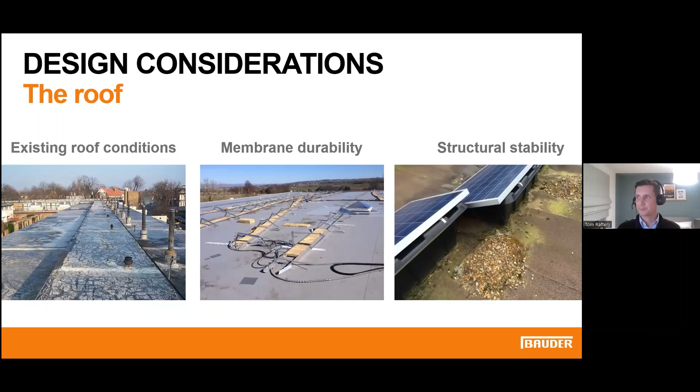So we've established that the roof's okay to put our solar on. There's a number of different ways that we can fix that solar to the roof. Historically, there were a lot of systems in the market that were installed through mechanical anchoring. These days, not so much. As an industry, we would only tend to install mechanically anchored systems where you're on something like a tower block, on a pitched roof, or on a coastal application where you've got really high wind loads.

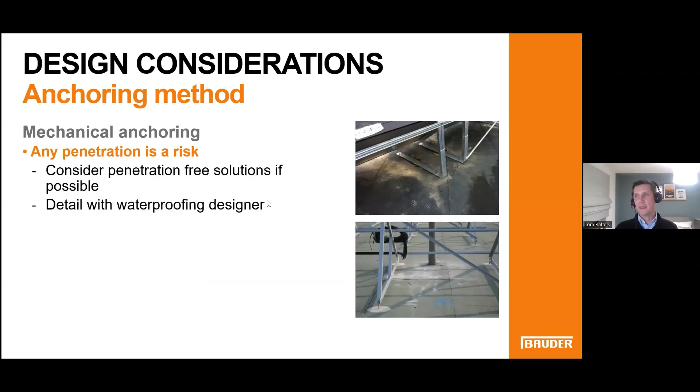If you do have to mechanically fix, then a bespoke fixing, this is a Nicholson IFP. Generally, they'd be provided with a Bauder waterproofing membrane, and that would be fixed down and then welded in. Mechanically fixed systems are more expensive, they're more time consuming. So as an industry, they tend to be avoided, but if you've got any of the criteria I just mentioned, then you will have to.

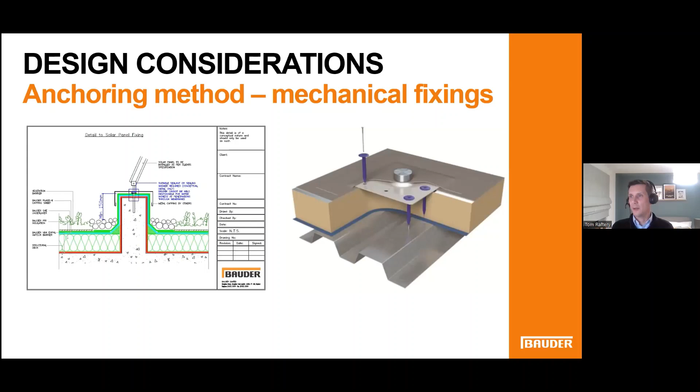We also try and avoid any penetrations through flat roofs. So where you can avoid mechanically fixing, generally that's going to be beneficial. So most of the systems installed on flat roofs will be ballasted. And there are lots of different options for ballasted systems. They are developing all the time, and they're generally these days really very good.

Once that system is in place, you can't do thermal surveys, you can't do a visual survey of the roof. Finding any leaks can be really problematic. And I'll come back to the warranty clauses at the end of the webinar, but just ensuring that there's no negative impact on the roof warranty is really important.

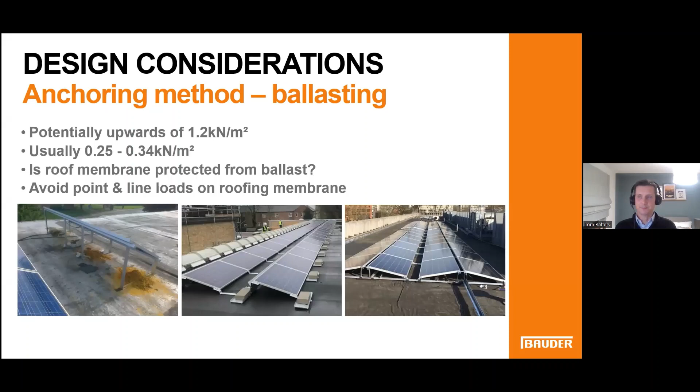Few quick design considerations regarding location and layouts of solar. Historically, the design tools, particularly for new build, things like IES, would have a drop-down box that would say, right, most efficient angle of panel, most efficient orientation of panel, and that's how it would design it as far as the thermal model is concerned. So you'd end up with your thermal model saying that you've got 30-degree panels due south. Actually, on flat roofs, it's very rare that we install solar in that kind of orientation.

At 10 to 15 degrees, you've got significantly lower wind loads. You're not putting a sail on the roof effectively, so you don't need to mechanically fix. You need a lot less ballast. As importantly, you can get a lot more solar on the roof. So what you lose in efficiency, which might be 1, 2, maybe 3% max, you gain by getting a significantly larger amount of solar on your roof space. So you will almost never these days see solar PV systems installed at 30 degrees.

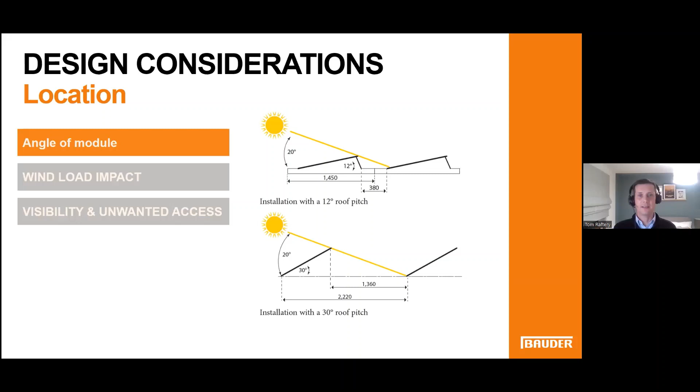Likewise, the thermal models will always push the system so it's orientated due south. If you've got a very large roof, and we've got the luxury of doing that, then that's exactly what we will do. We will always try and orientate the panels as close to south as possible to provide the maximum generation and return on investment. But with most buildings, we don't have that luxury.

We do a lot of east-west systems these days where you concertina the panels across the roof, and that's so that you can get more panels on the roof, but also we get a lower bell curve. So you get more generation in the morning, more generation in the evening, and on some projects, then you'll get more self-consumption.

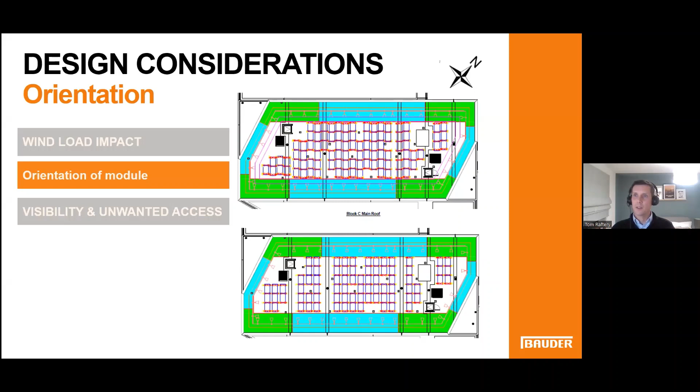Wind load is really, really important. The impact of wind load on a solar panel in the corner zone here will be about 7 times that of the wind load in the field zone in the center of the roof. So as a general rule of thumb, we try and avoid the corner zones, edge zones of a roof.

As planning conditions and the financials that I mentioned earlier get more important, gone are the days where we're installing 10 solar panels on a 4,000 square meter roof. We are generally filling every square inch of roof space that we've got, and that is putting pressure on the designers to push panels into corners and edge zones.

As a rule of thumb, you're going to have some kind of safe access. So you're going to have either an edge restraint, handrail, or you're going to have a man-safe fall arrest type system. Either way, that will stop you going too close to the edge of the roof, because that will be in that zone. But as a general rule of thumb, please avoid designing solar panels into those areas. As a very minimum, we would always assume a meter around the edge of the roof.

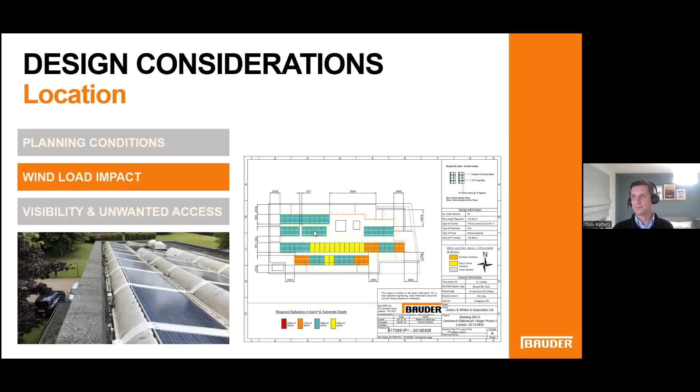Last point on designing solar into the roofs is shade. So hopefully you're not too surprised to hear that solar doesn't work when the sun's not shining. It also is significantly impacted by shade. Solar panels are installed in what's called strings. You have a string of panels, usually around 18, that act as one power unit.

Now, I must say that the panel technology and inverter technology is getting better all the time. So the impacts of partial shading are reducing all the time. But again, if you have the option, avoid putting solar panels in shade. So if you're doing a retrofit application, Martin or I will go out and do a survey for you. We'll tell you where the shade is and we'll avoid putting solar panels there.

In new build, it's much harder. This is actually the headquarters of one of the UK's main M&E consultants. This was the roof plan we were given, and this is actually what was on site. So unless we're given that information, we can't design based on it. And in this scenario, this system will probably only work at about 60 to 70% of what it was originally projected to do. So we're avoiding shade wherever possible.

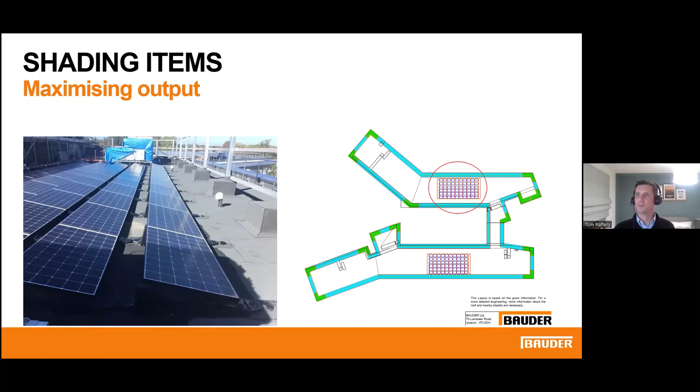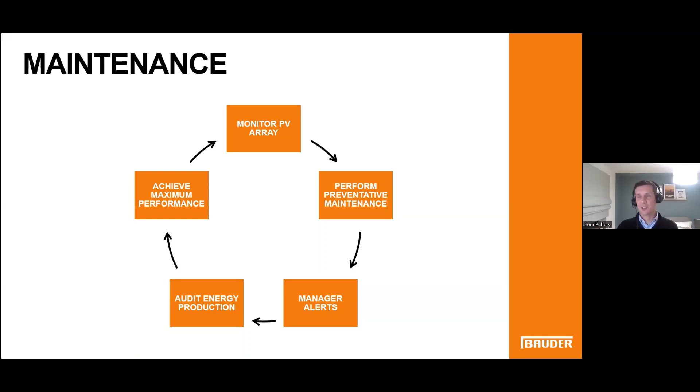So maintenance. As with any flat roof, solar PV requires maintenance. We start with monitoring the system. So all of the inverters that we provide that are available in the market these days will have some form of built-in remote monitoring. And that can take a number of forms, but generally it's a web-based monitoring system. There's a system here called SolarEdge, which is a really, really great solution. And that has a power optimizer behind each panel. So each panel works individually. So it has shade benefits as well.

But the beauty of SolarEdge is that you can log in, you can see what each panel is producing that day, week, month, year, in its lifetime. It also gives you alerts. So in this case, this is a project that we did in the Midlands in the UK. This is the roof. This is a schematic of it on the online portal. We can see that inverter number 2 isn't producing what it's supposed to. And in this case, the SolarEdge engineers could just log in, do a firmware update, and that inverter was working again without anybody going to site.

But we identified that there were a couple of optimizers that weren't working correctly, and they could send an engineer out to site to carry out maintenance and go specifically to those panels. So maintenance is really quick and really straightforward, and the system is down for a very, very short period of time. So monitoring is really important.

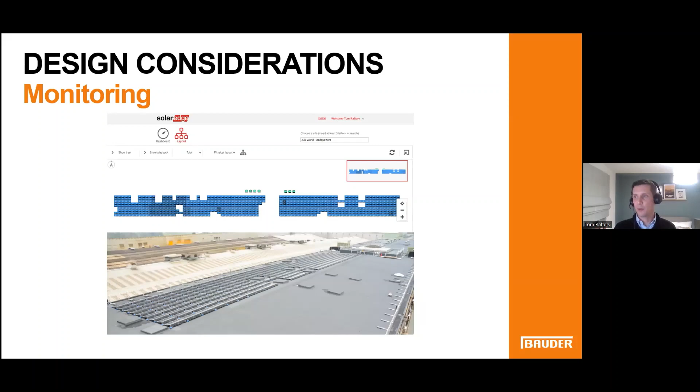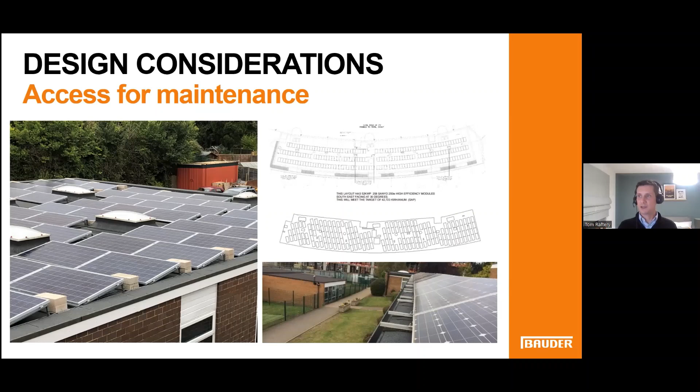Again, access around the perimeter, really important. Safe access. If you need a man safe or a handrail, that should be in place. You are going to have to access this roof. And that maintenance takes a number of forms.

If you are next to the Hammersmith flyover in the middle of London at 10-degree panel face, then the chances are you'll have to maintain these panels and clean these panels every 3-5 years. If you're in Galway near the coast at 30 degrees, the chances are that you'll never have to clean those panels, or you may only have to clean them 2 or 3 times in their lifetime. But it will depend on the outputs.

And again, that's where the remote monitoring comes in, because often you can be proactive. You can see if there's degradation and it's not producing what it's supposed to, and you can identify whether that's because they need to be cleaned.

We then require not so much maintenance, but an inspection of the roof side, so the mounting system or the connectors, every 3 years, and then maintenance of the actual inverter and electrical items. DC isolators should be on an annual basis. I'll come back to that bit a bit later on as well.

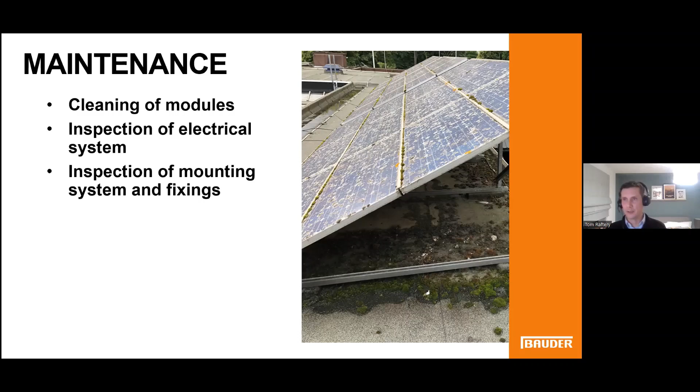Solar panels, how are we doing for time? So solar PV panels, part of the reason I love working in solar is because the technologies are moving all the time. There's always something new to learn. Largely, the panels that we are installing are silicon crystalline panels. So upwards of 95% of the European market will be silicon crystalline panels.

They are efficient, they're cheap, they're easy to get hold of. They very, very rarely go wrong. So for those reasons, this is the current lead technology. And just in amongst silicon crystalline cells, we've seen a move from a 270 watt panel back in 2018. Now we're looking at 430 watt panels for more or less the same panel face. So the efficiency and the technology is moving all the time.

And in amongst that, you've got lots of different options. So there's lots of different manufacturers. The panels very much look the same, even for somebody like myself who is involved with this day in, day out. If I go onto the roof and just look at the front of a solar panel, I would find it very hard to identify which manufacturers those panels had come from.

We partner with two manufacturers. JA Solar are one of the world's leading suppliers of panels. They're a Chinese manufacturer. They're very, very good quality, and they're cost effective. They generally have a 12-year warranty.

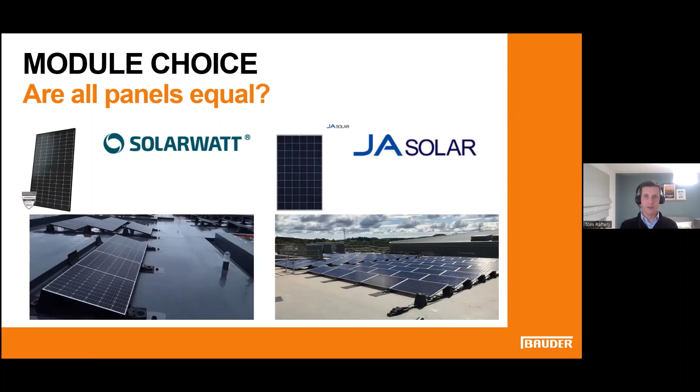The alternative to that is something like this Solarwatt panel on the left. That's a glass-glass panel with a 30-year warranty, and slightly higher efficiency. Also has an A rating from a fire perspective. So it depends on what your client and what you're looking for, but ultimately, there are a number of options out there depending on the project.

Inverter location is really important, because if anything's going to go wrong with a solar PV system, it is generally the inverter. So inverters should be somewhere where they're easy to access, to maintain and inspect. You can put them on the roof. They are IP65 rated. So if you have very little space internally, or if you just have a preference to put them on the roof, that's absolutely fine.

They should be out of direct sunlight, because they will derate over a certain temperature. They should also have a fire backing behind them if they're fixed to a wall, or a fireproof board underneath them.

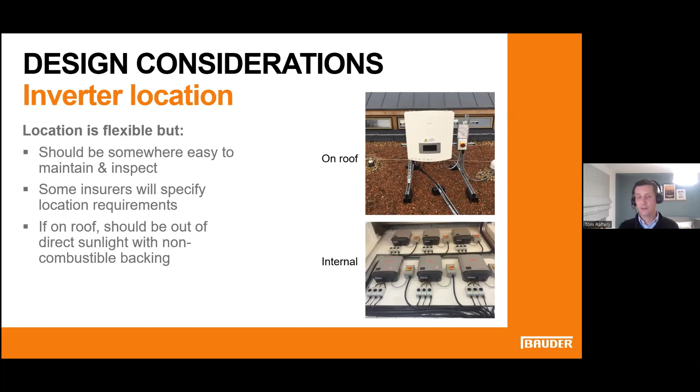I personally prefer to put them internally in a plant room where all the other M&E kit will be, generally because out of sight is out of mind. And if they're in the plant room, it's far more likely that they will get inspected and they'll get maintained. If they've got a red flashing light on the front, somebody will do something about it.